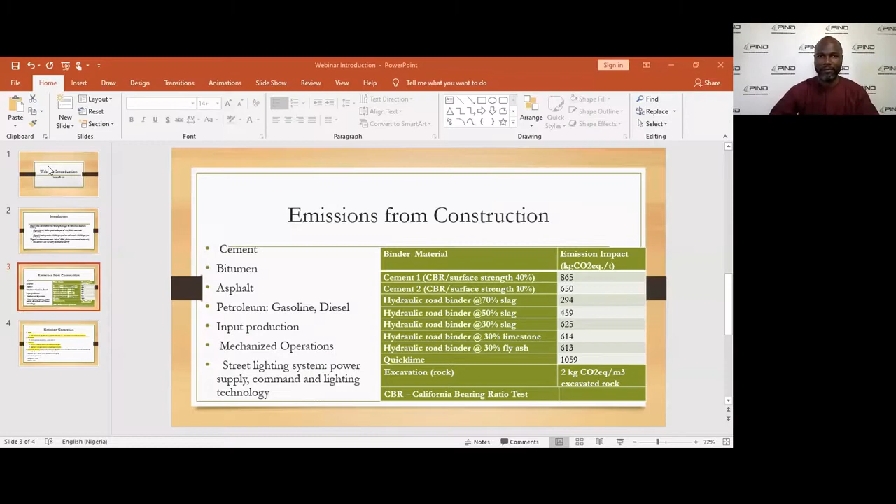I'm really excited that this conversation is coming on because we have loaded panelists from both academia and the hands-on field experience. So for us to start off, I just want us to look at what encouraged us to look into this area, however dry it has been. So just a few slides as an introduction to the webinar, and then we can get on.

Now we looked at public sector infrastructure related issues, and we know it has been a flogged sector in the sense that funding has been a challenge to it. But it becomes an additional challenge as well because apart from funding, in some ways the ones that have been done are creating enormous environmental challenges, looking at roads and buildings. We looked at, for instance, Nigeria's 195,000 kilometer road network, 60,000 of that are paved roads, and these are the ones that actually create the environmental challenges.

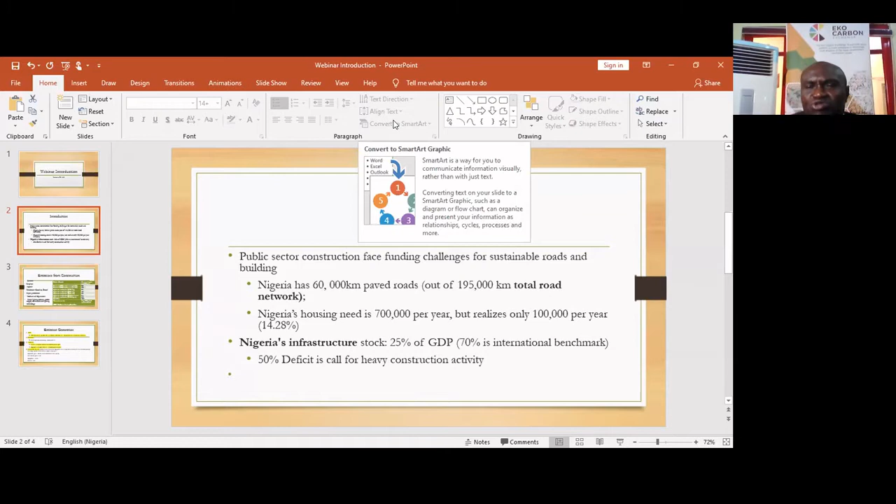We also have a need of 700,000 housing units per year in Nigeria. We realize we're at just about 100,000, which means just 14.28%. If we're going to go optimum, we're going to be creating massive environmental emission issues, which means if we're actually going to be going towards 20, 25, 30% and all that, we need to be ready to make it environmentally friendly. We also find that Nigeria's infrastructure stock is just about 25% of GDP, and international benchmark says countries should strive to get 70% of GDP as infrastructure stock. So we have a 50% deficit already, which means every government that comes on is going to be striving towards closing that gap.

Now we dive further into the emission issues in construction. I know that we have experts who are going to be talking to these issues as we continue. We look at the materials: cement, bitumen, asphalt, petroleum products, and then the operations itself, the mechanized operations, and power, and all of those that are part of what constitutes the built environment, whether it's roads, whether it's buildings, and all of that.

And when we check the emission impact of some of this, we find that for inputs like cement, first grade cement surface strength is about 40%, which means a lot of cement has been used, and that generates about 865 kilogram carbon dioxide per ton of that input. For cement 2, it's about 10%. Now if you use cement 2, even though it generates 650 kilogram carbon dioxide equivalent per ton, of course in our own environment which is tropical, you can be sure the road or building pavement will be breaking down quite often.

We also look at materials such as hydraulic road binders, and we found their levels of emission input, and that tells us a lot is being generated from that sector. It made us say, okay, can we start talking about this issue? Look at quicklime, for instance: it's 1.059 tons of carbon dioxide equivalent per ton of this material. So you see, generating heavily into the environment, and nobody is actually talking about this. You look at others like slag, like limestone, these are heavy emitters into the environment.

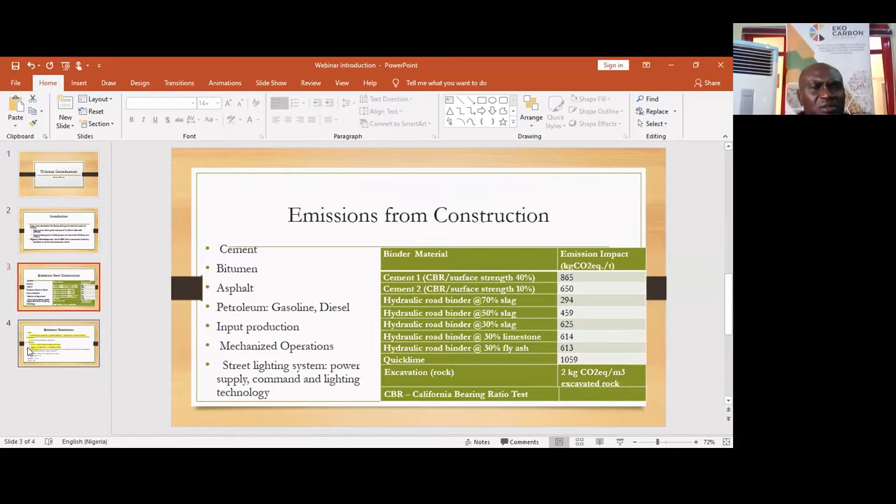Finally, we looked at total emission. In some cities, road construction generates 6 kilogram carbon dioxide per meter square per year of emission, and these are secondary roads. It could reach upwards of 1,100 kilogram carbon dioxide equivalent per meter square per year for primary roads. Now these are major, these are heavy. And you see, in cities especially, you'll find a lot of massive, heavy construction being done. For instance, in Lagos, the road being constructed basically with cement by Dangote should be classified at this level of emission. Also, earthworks generate their own emissions.

Pavements, when done with bitumen and asphalt, any bitumen in asphaltic concrete, this quantity is 0.672 ton carbon dioxide equivalent per meter cube of space. This is heavy, if you ask me. And then if it is also a pavement with aggregates in asphalt, it's 16 kilogram carbon dioxide equivalent per meter cube of space.

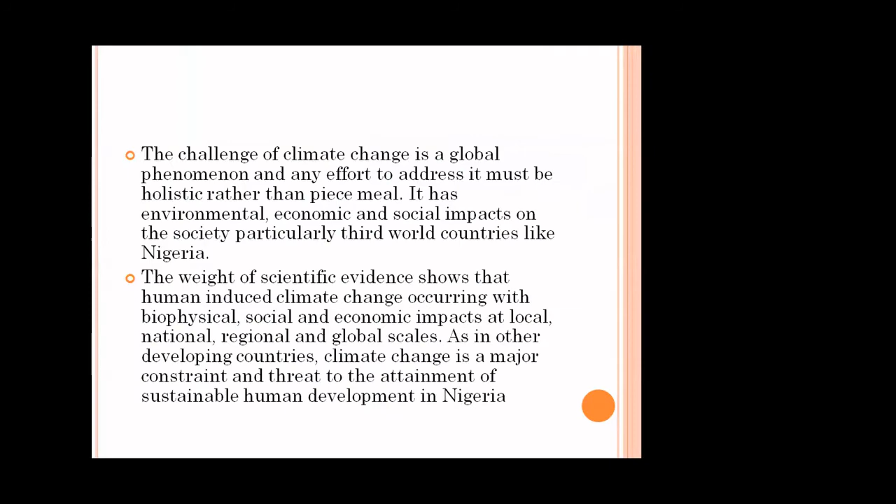In doing my presentation, I need to do a little background introduction about the sources of emissions in the construction industry. Basically, what makes us interested in this topic is the harm it does to the environment, both health-wise and to the productivity of the people who live in the city, in the country.

There have been a lot of research and publications on emissions. In 2009, DFID predicted that climate change could result in loss of GDP of between 6% and 30% by 2050, and that could be translated to a loss of almost 100 to 150 billion naira in Nigeria if we don't adapt a more sustainable policy to control emission.

The construction industry, building emission, is about 50% of the carbon emission that causes climate change. And in the construction industry, emission comes in different forms, both in the production of the raw materials for construction, like cement, paint, blocks, and all these things. All these things use fossil energy, which emits carbon.

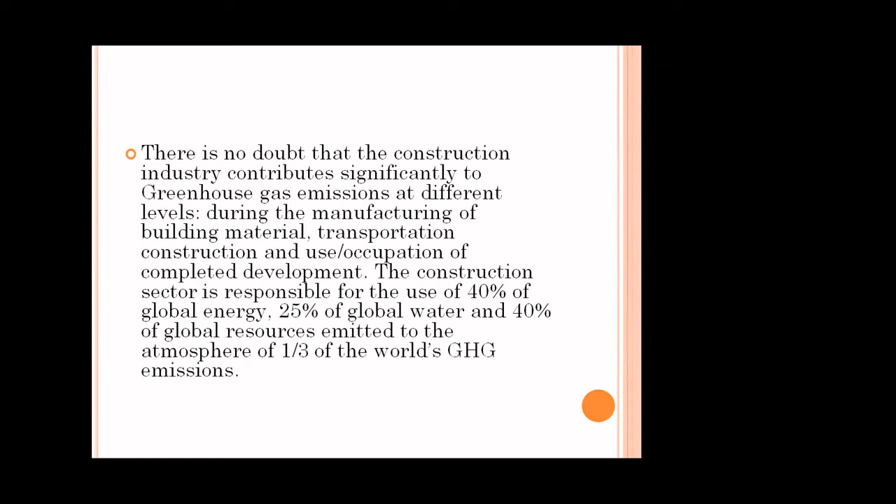During the construction phase, about 60% of the world's electricity is consumed. Inefficiency in the use of energy will gradually degrade the quality of the environment globally. Carbon dioxide emission is triggered by energy released during the building life cycle, starting from the production stage, construction phase, operational phase, and demolition phase.

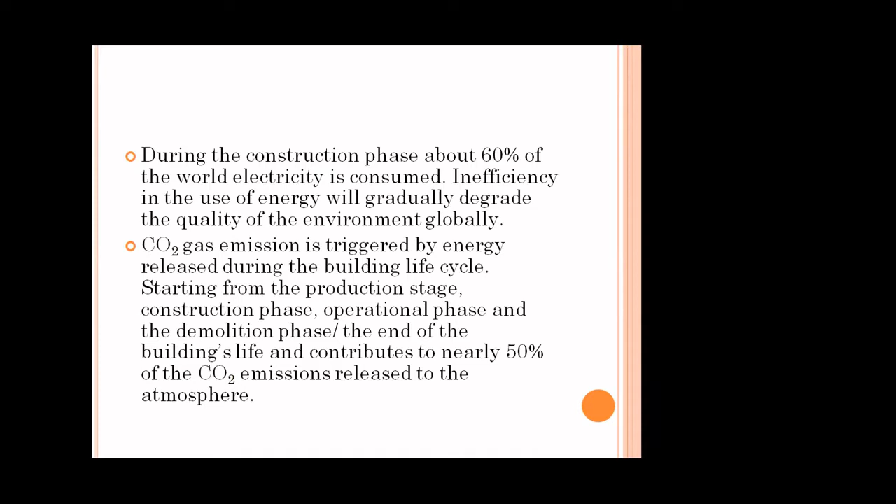The end of the building life contributes to nearly 50% of the carbon dioxide emission released to the atmosphere. There's no doubt that construction emissions have adverse effects on the health of individuals that live in the vicinity or the country. When health is affected adversely, aggregate output in the country will be reduced. This is in tandem with the saying that health is wealth. Without good health, it will be almost impossible to undertake any meaningful economic activity.

The level of emission into the atmosphere in Nigeria as a result of construction activity is a major concern in society. I mentioned road construction, the carbon that comes from road asphalt, using concrete in construction of buildings, and iron and steel. During the production of iron and steel and at the construction level, it emits carbon.

The life cycle of a building provides an organized pattern of connection between the built environment and global climate. First, at the predevelopment level, where we clear the forest, we destroy the carbon sink which the forest provides. This stage involves conversion of virgin land into a variety of activities connected to the destruction of carbon sinks in the forest.

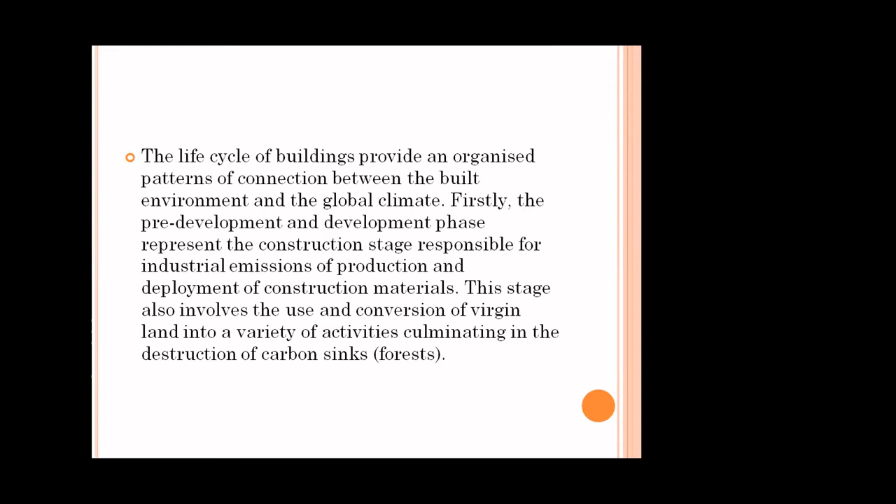Next is the operation stage, the most active life of the building. Energy is at its peak at this stage, as household activities rely heavily on fossil fuels. For electricity, most people still use filament bulbs, which release 90% of their energy as heat. Only 10% of the energy in bulbs produces light. The remaining 90% produces heat energy, which heats up the environment, and carbon also goes with it.

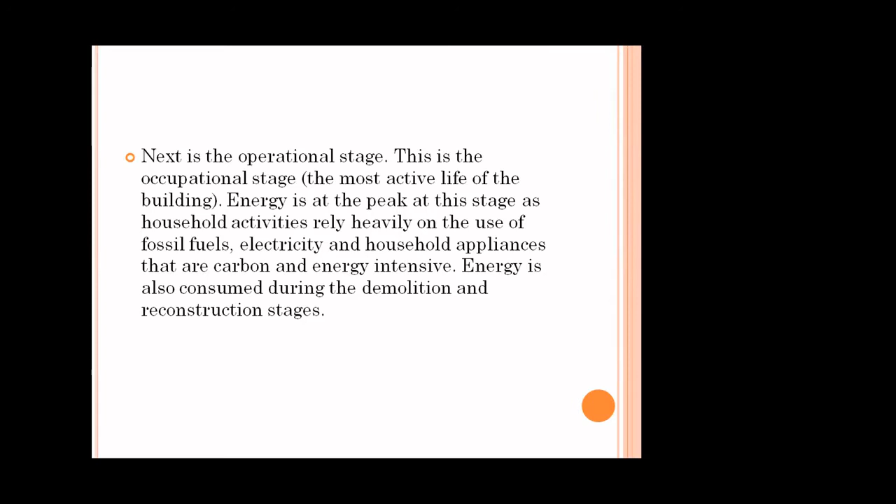The same applies to facilities we use, like gas cookers, cooling facilities, and heaters in countries that are in cold regions. So all this use of electricity and household appliances is carbon and energy intensive. Energy is also consumed during the demolition and reconstruction stages of buildings. Carbon dioxide is the most important greenhouse gas and the primary substance responsible for global warming and hence climate change.

Any attempt to mitigate emissions in the construction industry must pay special attention to carbon dioxide emission, among others, as it is at the center of climate change. Climate change experts have observed that the manufacturing industry, transportation of building materials, and construction of buildings consume a huge amount of energy, with consequent emission of large amounts of carbon dioxide, which have negative effects on citizens and their health.

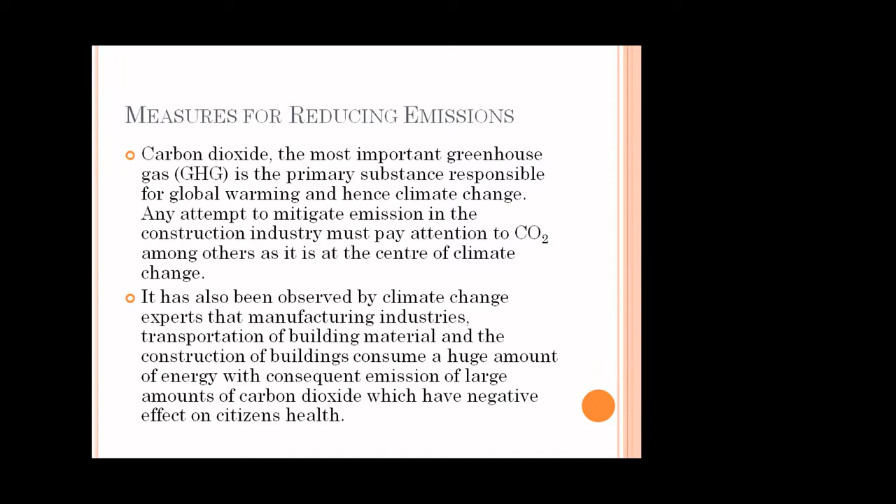In order to address the challenge of carbon emission, particularly in Nigeria, there is need for an environmental policy targeted towards elimination of carbon emission through the use of eco-friendly building materials. There's a study that came out recently showing that bamboo has more tensile strength than steel, and it could be used for reinforcement instead of iron and steel. I believe bamboo will have less environmental effect compared with the steel we use today.

Some people use EPS, expanded polystyrene, with mild steel and small concrete, which usually reduces the quantity of concrete used in construction. All these things will reduce the level of carbon emission in the construction industry. This will involve provision of emission monitoring and management, and awareness creation among citizens, so they are aware of the danger and havoc caused by carbon emission to society.

And its danger in escalating climate change. This will also include carbon rating. We don't have carbon rating. If you have carbon rating, it gives businessmen and industrialists the incentive to reduce their carbon emission. If you are given carbon credit or carbon rating for reducing emission by a certain level, that will encourage users to reduce carbon emission in their enterprise or behavior. Every manufacturing industry must have an environmental department, which should be drawn from national policy.

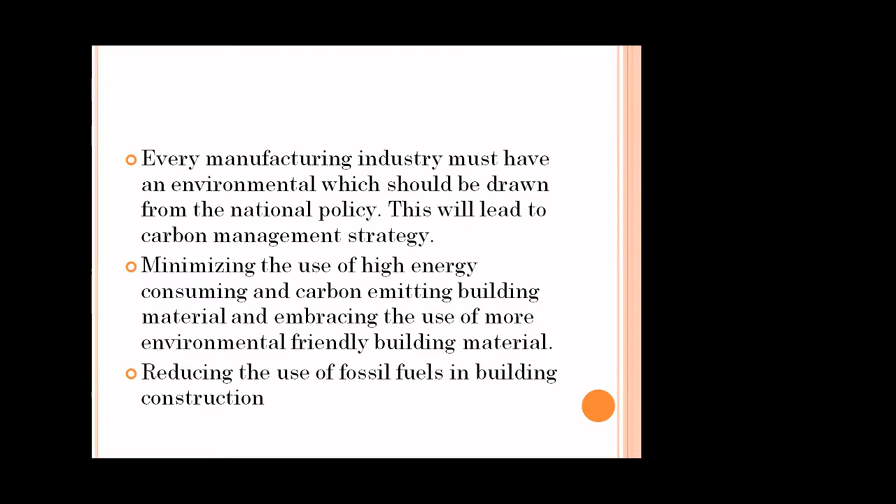Reducing the use of fossil fuels in building construction, all this will help to reduce emission. Carbon rating buildings constitute the most pronounced tools being used in recent times by real estate professionals in countries like UK, US, and Canada, which is still lacking in our country. And it helps to reduce maintenance costs of buildings.

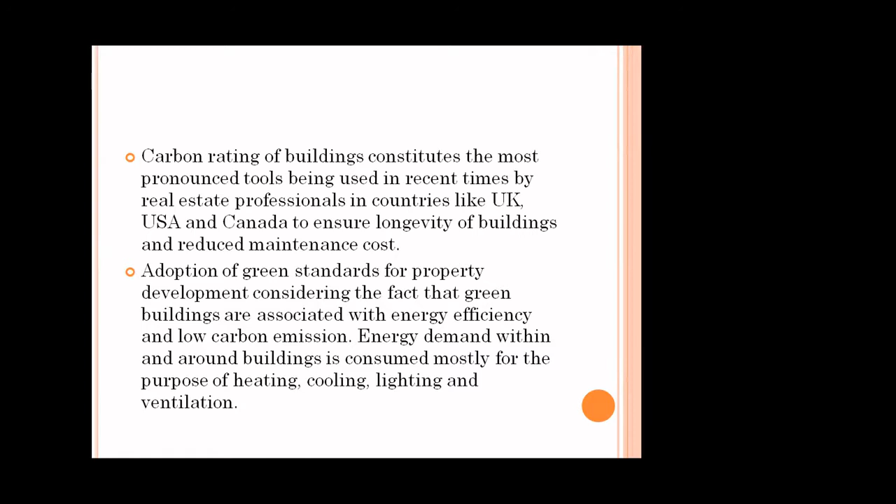Adoption of green standards for property development will help us go a long way in reducing emission in building operation, considering the fact that green buildings are associated with energy efficiency and low carbon emission. Energy demand within and around buildings is consumed mostly for heating, cooling, lighting, and ventilation.

Features of green buildings imbibe high-tech and modern energy saving practices like sensor-controlled lighting and compact fluorescent and energy-saving lighting, high efficiency heat pumps, geothermal heating, photovoltaic cell arrays, and optimal use of fresh and natural light, harnessing natural circumstances for cooling, and installation into design to reduce energy requirements in building operation and prevent greenhouse gas emissions.

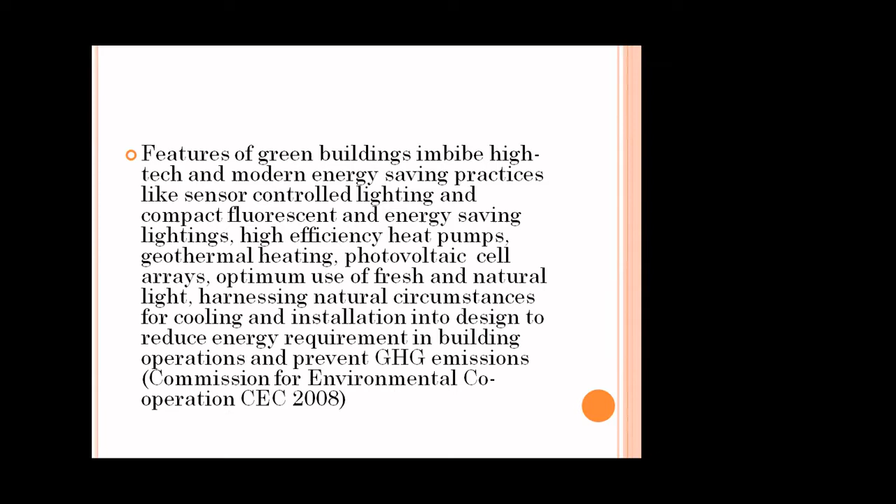This is from the Commission for Environmental Cooperation. Green buildings focus on increasing the efficiency of resource use, such as energy, water, and material use, reducing the impact on health.

So you can see that in Nigeria we are still yet to embrace this issue of green buildings. Currently there are about 6 or 7 certified green buildings in Nigeria, and they are all located in Lagos, in VI and Ikoyi, and only 7 of them are certified, and they are all commercial buildings. Currently there is no certified green residential building in Nigeria.

And from the construction industry, in the building sector, residential buildings emit the highest level of greenhouse gas emission, have the higher level of greenhouse gas emission, which is a major problem. So we have to look at having a green standard policy.

In the US they have the LEEDs, this is Leadership in Energy and Environmental Design. In the UK they have the BREEAM. In Canada and other different countries, they have their own standards. In Africa, it's only South Africa that has already embraced green standards and sustainable environmental policy.

So we need to actually have a policy that will help us control greenhouse emissions in Nigeria by having a green standard in buildings, an environmental policy that will guide industrial operators on how they emit carbon and other emissions that are not friendly to the environment. We cannot allow everybody to do whatever he likes. That becomes a society that is not organized and prepared, leading to anarchy.

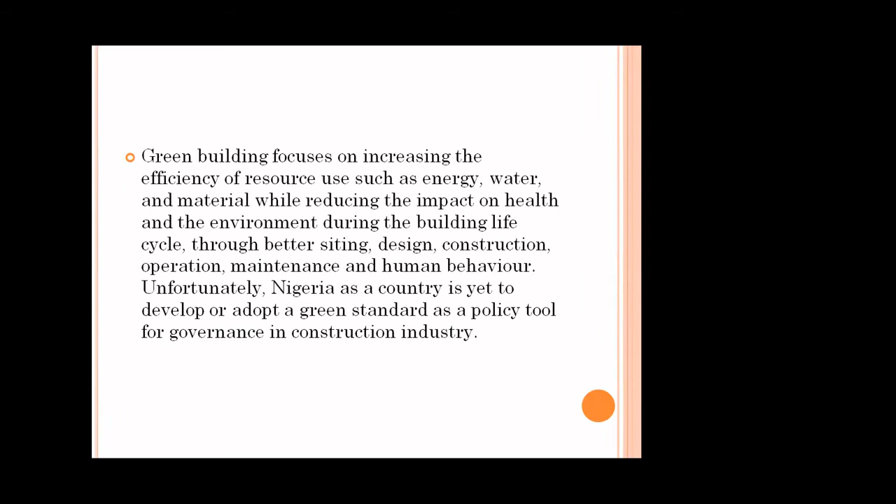So Nigeria as a country is yet to develop or adopt green standards as a policy tool for governance in the construction industry. So as a summary, we have to look at the materials we use. They have to be eco-friendly, so that we have less negative impact on the health of society.

We have to introduce carbon rating. We have to introduce green standards. We have to embrace more environmentally friendly materials in construction, in the construction industry, and there must be regulation guiding industries on carbon emission. And there must be a minimum level or a maximum level of emission that should be tolerated by industries in the construction sector.

Without this, it will be anarchy in the construction industry. So we need to have a policy that will guide us. But if there's no standard, then the result is chaos. So we have to standardize our construction industry in terms of environmental policy and energy standards, including carbon emission.

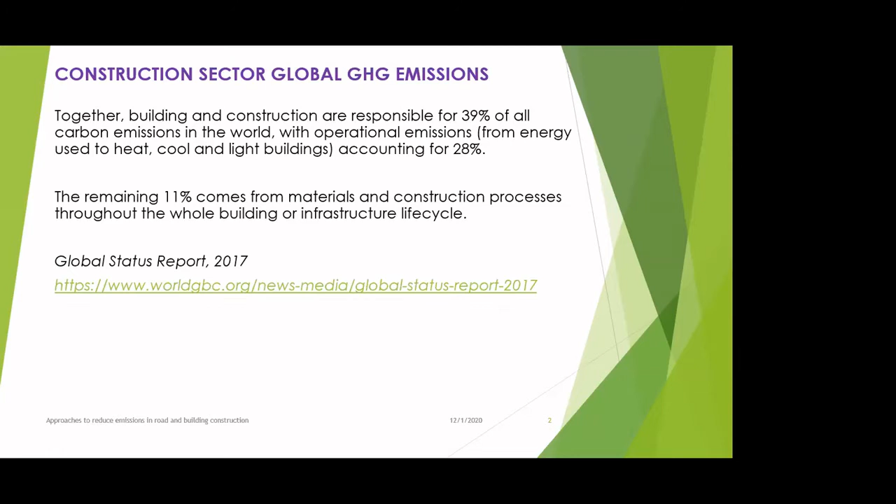Generally, the biggest GHG emission source in the construction sector is energy. And just as Prof has said, a lot of construction processes still use a lot of non-renewable energy, whether it is natural gas, oil, coal, or sometimes even as bad as petrol or diesel, which even leave impacts on the road sometimes. But that's where we are at this stage.

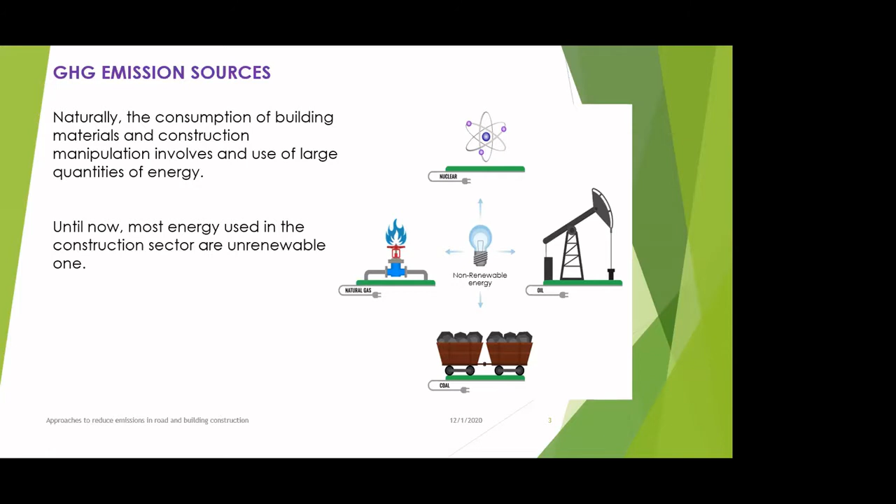It's also very good for us to note the GHG generators. So what are the generators in this entire construction process? We have the materials, which some will call the supply chain, but nonetheless, they're still the materials. Mr. Innocent had given us the carbon emission equivalent for each of those products earlier, cement, bricks, and all of the likes.

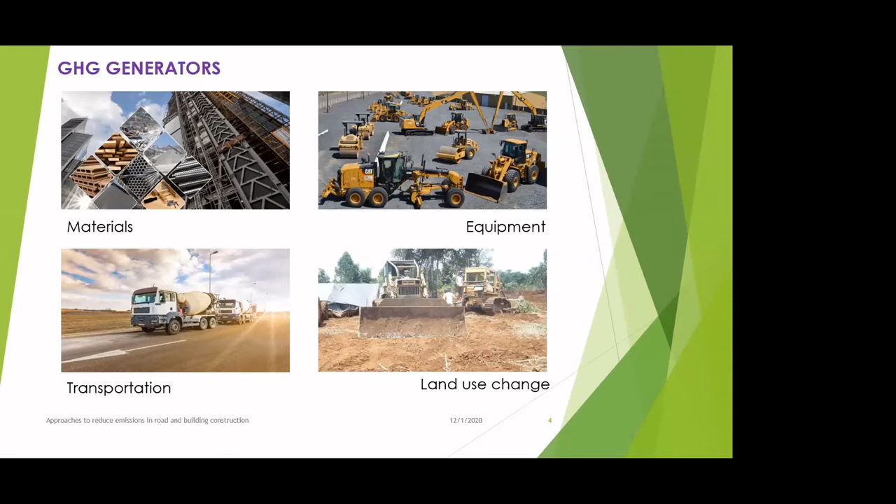Then we have the equipment, which is also a big factor - equipment usage, transportation of these materials to and from site. And then land use change, very, very key. Just like you said earlier about forests being destroyed in Cross River, it's happening everywhere. When these things are done, there's no provision to actually reabsorb this carbon, maybe by planting trees across or making gardens and other smaller efforts.

But my focus will be on the approaches. I won't go into details of what Prof has talked about, and the approaches are very practical, and some are actually being used. The first one is in the materials. As we know, these materials are heavy in terms of carbon and GHG emissions, whether it's concrete, steel, or even wood, which can sometimes be heavy because wood most likely leads to deforestation if you don't plant back.

But nonetheless, we've had situations where a lot of construction has been done by reusing and recycling some of these materials, concrete and steel. I'm sure Prof can give more insights on when we calculate BOQs in construction sites - bill of quantities - where some contractors come with ridiculous quantities to be used, and an environmental engineer or someone who knows about sustainability comes in and starts cutting everything down, saying you don't need all of this if you reuse and recycle some of these materials.

Also, we've seen the use of warm or half-warm asphalt. We know that in Nigeria we like to use asphalt hot. Hot means more emissions, hot means more energy, but if it's used warm at a lower cooling temperature, it performs the same function. Also, use of fly ash in concrete.

This is mainly used in countries where they have a lot of coal residues. I know Dangote is trying to do that, especially because the Obajana plant is being run on coal. So it's something you can introduce fly ash into concrete being used for road construction, and even sometimes for buildings, because fly ash has also been known to be a very good sticking agent.

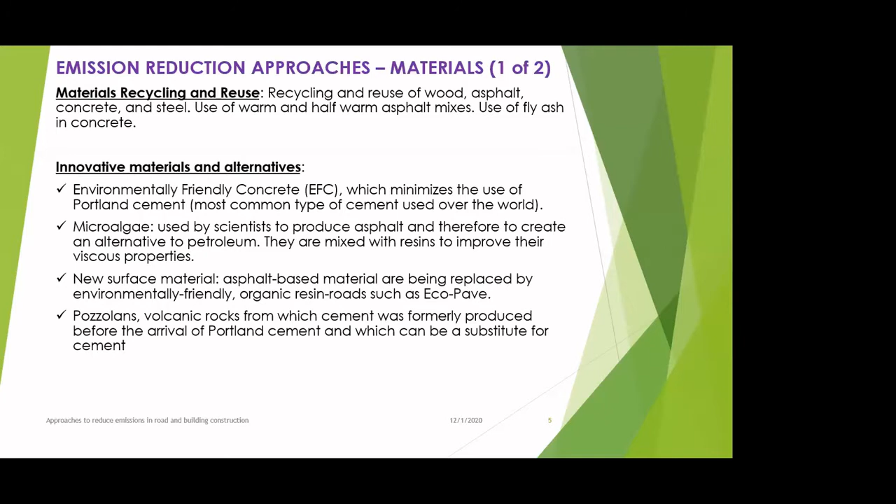Still on materials, we should also note - Prof earlier mentioned replacement of wood and steel. I wouldn't want people to get confused, thinking are we going to be using bamboo for Third Mainland Bridge? No, it's not that kind of replacement.

We had to put an entire concrete barrier just to show that the road is closed. Somebody colliding with that concrete is a safety hazard on its own. The safety barrier, I mean, you can't have bamboos or even reinforced plastics. It has to be concrete. Everything just has to be so hard and difficult, and all of this leads to more emissions.

So, location of safety barriers, redesigning some roads whereby you have wood barriers. We won't have wood barriers on Third Mainland Bridge because of the water, but I've seen areas of Third Mainland Bridge - I couldn't get the picture - where maybe you're about to climb the bridge around the Adekunle or Yaba axis. These areas are very close to residentials, very close to houses beside, and then you still have concrete reinforcing it. To me, that's a waste of concrete. But this was done way back.

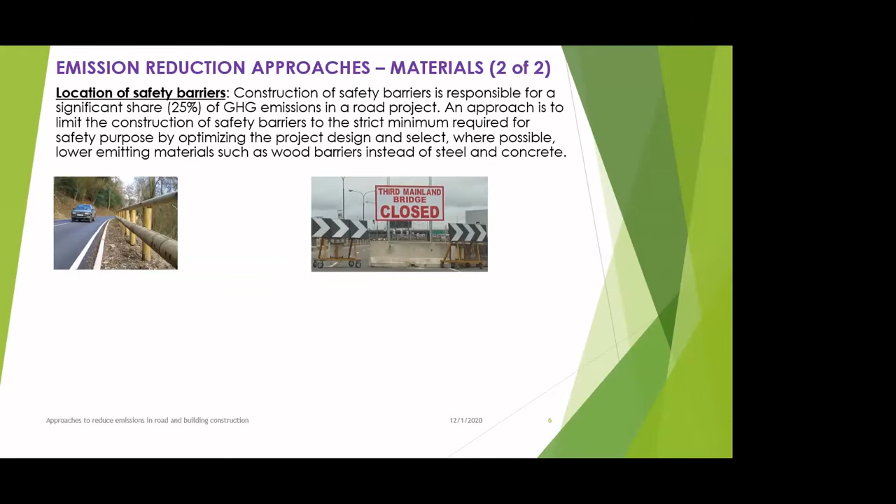So it's just a lesson that going forward, road design should actually look at areas where they can reduce some of the usage of these high emitting materials.

Now let's go to equipment. Equipment is very key in construction, whether it is road or building. Luckily for us, Nigeria is not yet in that picture, but we tend to use heavy equipment instead of labor-intensive techniques. Naturally, research has shown that using a form of light equipment with labor actually reduces your emissions, which is true - people will emit less than the equipment.

So again, research has shown that if it's for the same purpose, which is to make it straight, human error is not that significant. So why don't you use more labor-intensive techniques to reduce your emissions?

And generally, equipment selection, fuel selection - now we have equipment running on natural gas, which is less polluting - reducing idling.

I don't know if most of the people on this call are aware of what is going on in Lagos with the Oshodi-Apapa Expressway being done. This is a route I pass almost every day, and sometimes on the route I just take pictures of equipment idling. They've not finished laying the cement, and the guy that wants to straighten the cement is already running the device - maybe it's to keep it warm, I don't know. But we have that high level of idling, and sometimes this can be neglected. Contractors just feel it's nothing, it's not a big deal - how many minutes is this going to run? Not knowing that 10 or 20 minutes has actually contributed a lot to global warming on the larger scale.

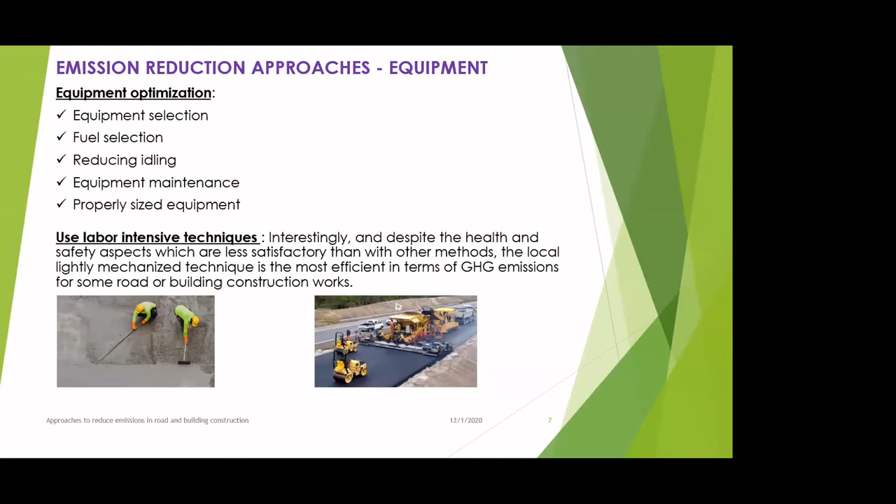Equipment maintenance is key. We've seen situations where equipment actually break down on site, and then properly sized equipment - this will also take us into transportation.

This is another key part where emissions skyrocket in construction projects, especially even in building construction. Again, we now have natural gas powered trucks, so we don't have to rely on petrol and diesel. The size of trucks matters a lot. I've seen sites where we just see tiny trucks supplying sand and granite, and the more trucks you have, the more emissions. Get larger trucks that are going to emit less and make your transportation more efficient.

But we see a couple of smaller trucks just coming in and out, and it's more emissions. It's also more gridlock in terms of traffic. Improving driving habits, less idle time, more night transport means that you get to see less traffic during the busy period, and you reduce your emissions.

I also feel some of these things are very, very important in reducing cost in construction. Sometimes we come up with these reduction approaches and contractors think it's going to increase cost, but by the time you do the cost benefit analysis, you find that it's actually cheaper - you use less diesel, less petrol for your truck supplying the sand. All it takes is better planning and design. You don't have to make everything rushed.

They're always doing things in a rush, so they want all the trucks to come on the same day. But when you have a plan of 3 or 5 months, where you know where your raw materials are going to come, then all of this can be put into perspective.

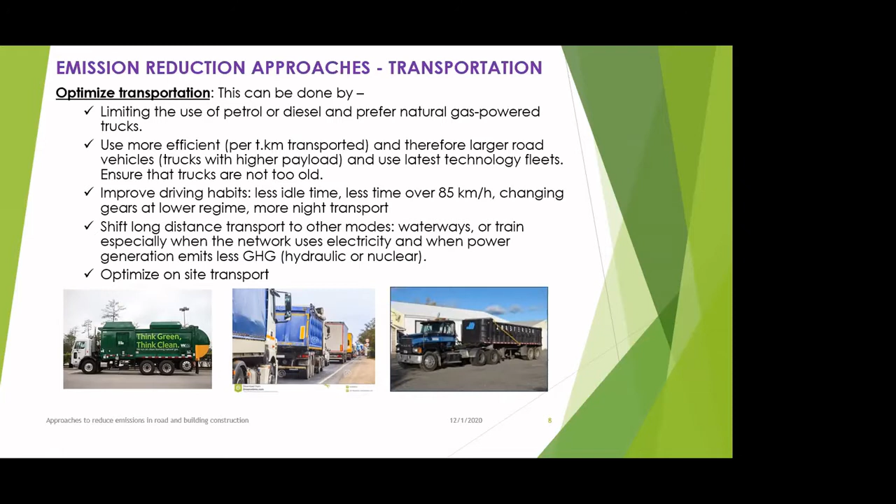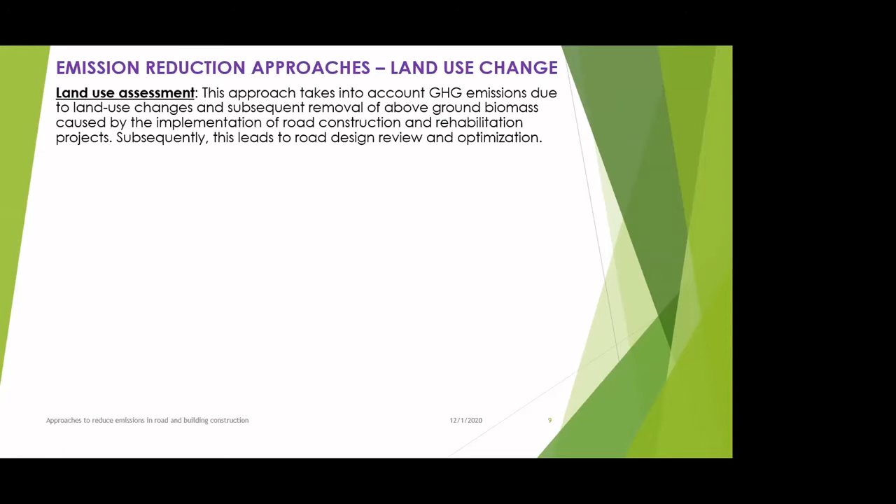And then land use assessment. Just like we've said, land use change is critical in any construction, whether residential or building. This is the part where we do the environmental impact assessment to check the land use. A lot of constructions don't put this into perspective - they just feel the road is more important than the vegetation, or the road is more important than the households. Once we begin to think like that, we begin to run a capitalist economy and forget about sustainability. So land use is also very key in reduction approaches.

But very quickly, I wanted to run us through rating systems. Why did I want to do this? Prof mentioned earlier that there are about 6 or 7 buildings certified, and I wanted to reiterate this. In 2014, IFC came together with EDGE - that's Excellence in Design for Greater Efficiencies - and they did the EDGE building certification. For now, only 5 buildings in Nigeria have that certification.

The Alpha 1 building in Eko Atlantic City is a commercial building for offices. The Greenage Student Housing in University of Abuja is still under construction, same with the Bluewater Lagos Homes - this is actually being done by ACA, African Capital Alliance, with Elalan. The Cornerstone Towers are commercial, and then the Peridot Parkland Estate in Abuja, also residential. Cornerstone Towers are commercial. So these are 5 buildings that have been certified by EDGE.

Now, unfortunately, I don't think there's any green building certification locally, so for now all of us will be using the IFC EDGE. But EDGE has its own limitations - it doesn't focus entirely on construction, EDGE focuses a lot on operations, after the building has been constructed. Nonetheless, EDGE also takes into account the raw materials used in construction, so it takes into account material usage.

But EDGE, for instance, will not calculate transportation of materials or the land use - no, EDGE wouldn't do that. EDGE will focus on the operation, so after you build the building, what's going to be the emission, energy and water reduction, and also the raw materials, energy and water reduction that were used in the construction phase. But nonetheless, it's a fantastic starting point to begin rating buildings.

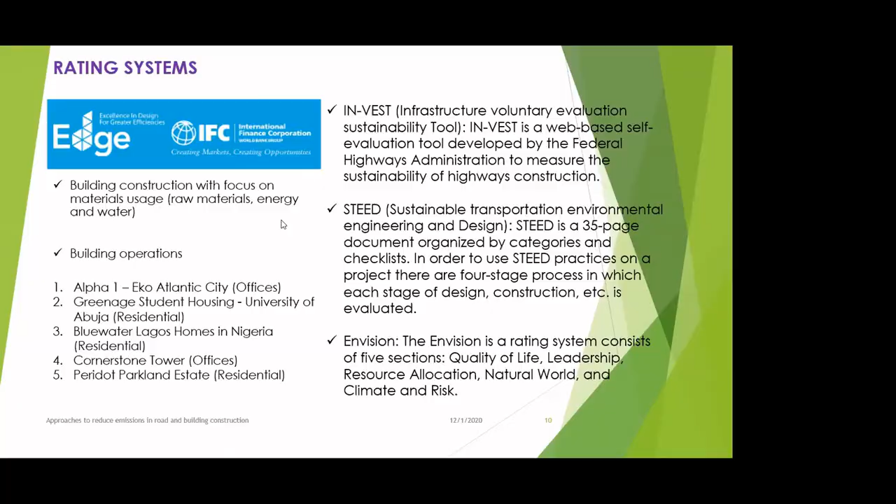So thank you very much for the attention. I hope I've been able to cover some of these approaches, and we'll be willing to take questions after. Thank you. That was very enriching.

We cannot go on to rehash what you already have given here, but it's very loud with respect to the approaches, especially with respect to materials recycling, adoption of innovative materials, and the use of alternatives, to enable our construction activities, particularly given that we adopted some practices before now which we need to change. But now we're at a crossroads between not having the appropriate policy to excite or encourage this to happen, and then having some foresighted investors going ahead to lead the way.

So it's very, very important, and you've given us also some of those innovative alternatives. The environment-friendly concrete, and then microalgae, and then you have this new solid material and the pozzolans. Very, very revealing.

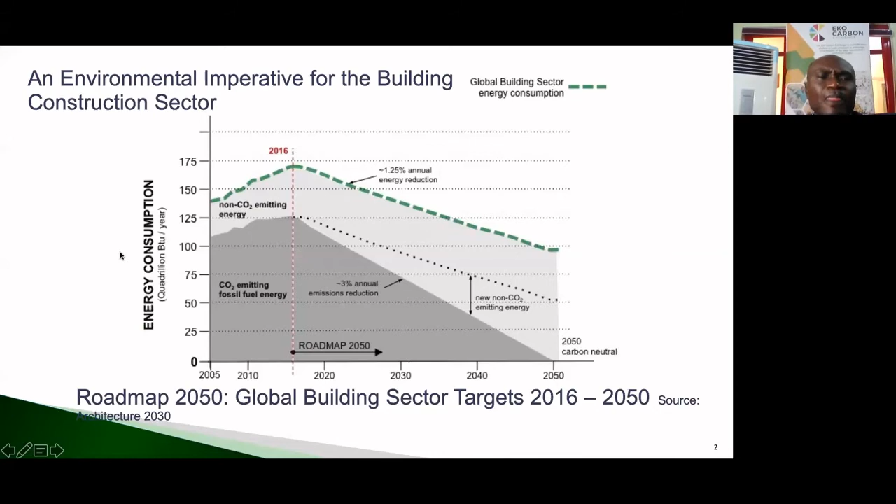Thank you very much. A lot has been said from the past two presenters, and I think I would just piggyback on everything that's been discussed. There's a lot of information they've provided on reducing carbon emissions in the built environment, a combination of the building industry and, of course, roads.

What I'll share with you today is more of our experience having done this. The Foundation for Partnership Initiatives in the Niger Delta has invested in what we count as a green building, a sustainable building, a low carbon building in the heart of the Niger Delta.

What you're seeing right now is just a quick snapshot of the destination. There's an environmental imperative for the building construction sector, where we need to get to in terms of reducing emissions. There are different commitments, and Nigeria happens to be signatory to many international conventions towards reducing carbon globally. The global construction industry, particularly the building industry, contributes immensely.

It's an opportunity for a country like Nigeria to contribute as part of their own NDCs, the nationally determined contributions towards reducing emissions.

The other sectors too, when we talk about buildings, we don't just talk about residential, industrial, and commercial. Many things happen within the building, so you really can't isolate and say it's just the building. When you think about the industrial sector, the opportunities for industries to reduce emissions lies in their buildings one way or another.

They have to retrofit buildings. The heavy engineering companies and organizations have to think about how to retrofit buildings as a way to contribute to their own environmental stewardship.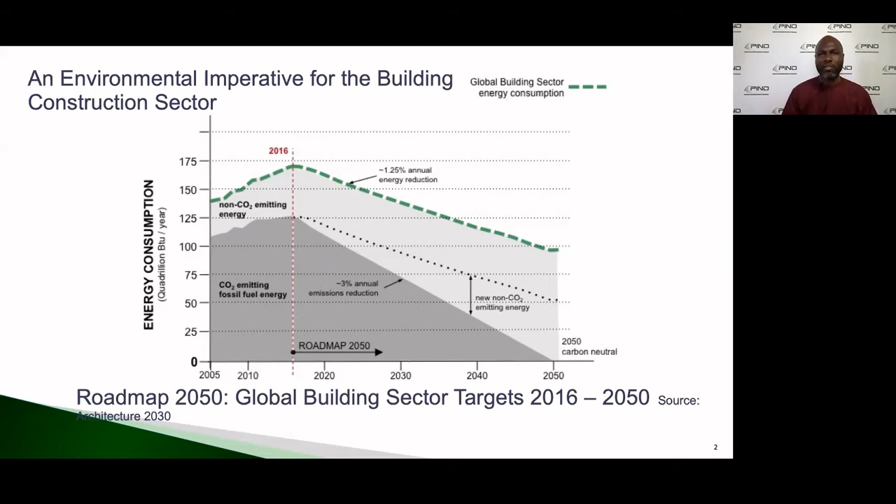So now, how do we go about it? Building construction related emissions are largely, as Dr. Tiwa said, embodied energy, which constitutes about 11%, and operative energy, which is about 28%. In combination, that's about 39% for the whole sector.

Embodied energy means the primary energy that goes into the manufacture, installation, transportation, use and disposal of materials—all the component materials that go into a building assembly. That's the bricks, the mortar, the joinery, the floors, the timber materials, the paint, the roof materials, the ceramic tiles, and the like.

So the embodied energy, for example, using a brick—if you take a unit of a brick, or a square meter of a building wall, you can actually quantify how many emissions that contributes. That's embodied energy, and that's an opportunity because we can actually reduce that. We have a lot of control in a place like Nigeria to reduce that.

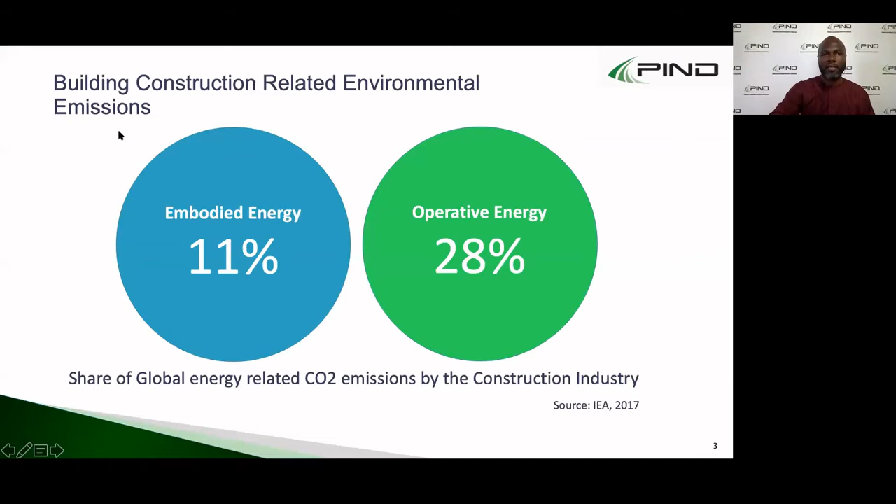Our case study in this instance is the ATED Center. ATED, for those who don't know, is the Appropriate Technology Enabled Development. It was an intervention, a project under which PIND ran over the last 5 years, and we wanted the center as a hub for those activities. So we wanted to build a low carbon building essentially.

This building was constructed in Warri, Delta State. It was built in 2015, to the Passive House standards. As Dr. Tiwa mentioned, there are different standards for construction, ratings and the like. Passive House standards emerged from Germany, from the Passive House Institute. It's very common around the German-speaking parts of the world, some parts of Europe, and America. It's a way to save energy.

The whole practice and idea of building using Passive House is using passive rather than active methods - passive solar design, using the sun as a way to take energy and use it to the benefit of the building design. Compared to conventional building methods for a new build, we were able to save 75% in terms of the energy that would have been utilized in that building.

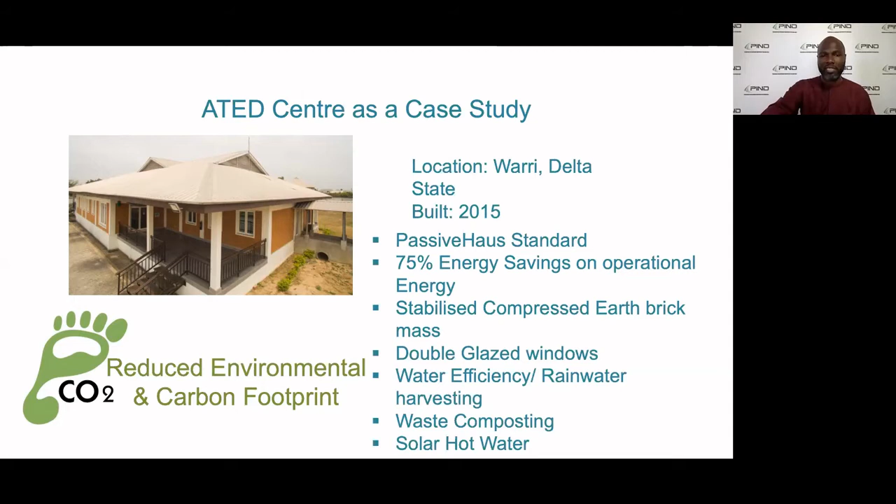So this building, compared to a business as usual scenario, has a massive reduction in its environmental, or rather carbon, footprint.

Before we set about doing this, what were the things we tried to identify? We wanted to identify that in a country like this, we can't just use a template. There's the general category of things, the usual suspects. However, in a place like Nigeria, since we don't have the standards, we have to adopt what is most reasonable. So we expect a lot of understanding of the local context - it has to be contextual to what we practice in the country.

Some of the key environmental categories we were prioritizing are climate change, fossil fuel depletion, ecological emissions, which leads some way to degradation of the environment. Water is a very major resource.

We think about water scarcity, the water stress index for most localities in the country. Resource depletion - that's your trees, and clearing of site itself has a major bearing on that. That's when the footprint of a building starts to count, when you start felling trees to site your building. Waste disposal is a major part too, either construction waste disposal or waste disposal during the life of the building.

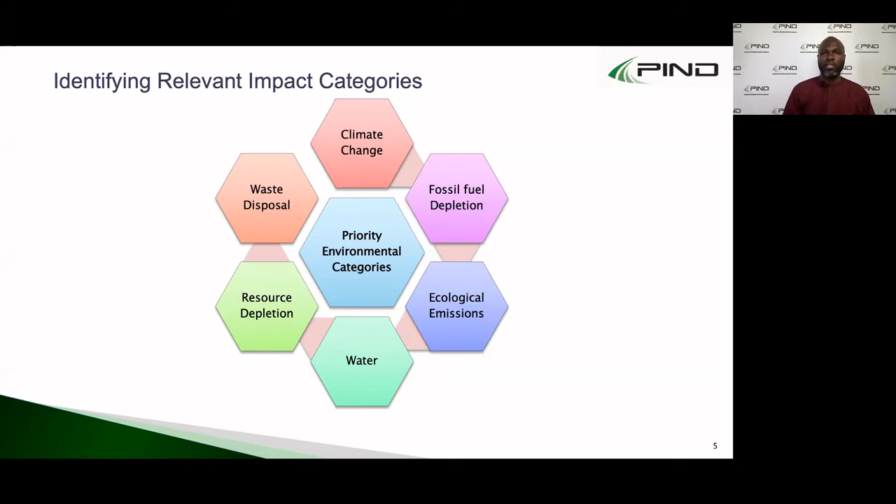Our approach was largely what you call a cradle to grave pathway - that's a whole life cycle. We look at the whole building, the whole life cycle of the building, right from the time the brick comes out from the factory, to the time it's shipped to the front of the site - what we call cradle to gate - to the site, and of course to the end of its life.

So you can literally track every unit of material used in that construction in such a way that you can think about its replacement. Some materials will probably have a 25-year lifespan; some materials need replacement 10, 15 years down the line. So we do a very thorough kind of analysis at that initial stage to look at what the impact per material and specification would be.

This is another opportunity. While we were developing this framework, if you look at the left part of that screen, you can see it's for new buildings. But of course, the moment your new building spends a couple of years, it becomes an existing building. Dr. Tiwa was making reference to the Edge, the IFC Edge tool, largely catering for some constructed buildings. So if you have those kind of constructed buildings, what are the things you need to keep your eyes on, so you don't lose the benefits that happen at the initial stage while trying to achieve gains with embodied carbon?

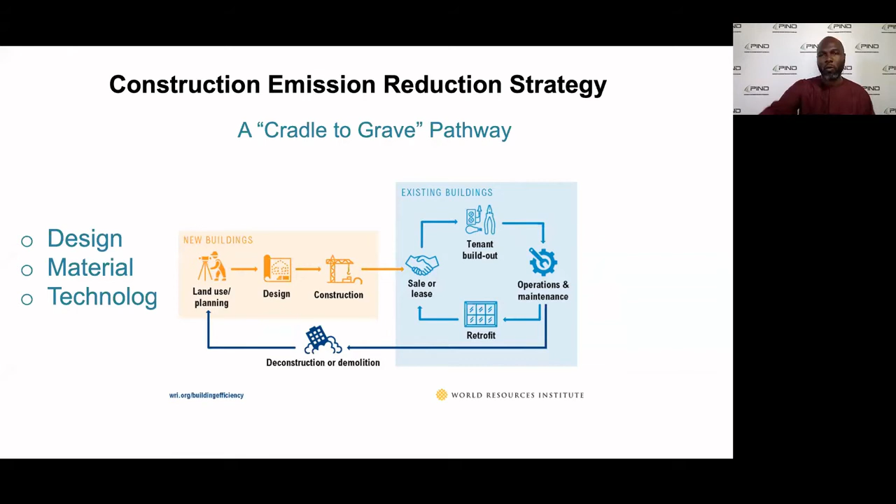So what you have on this slide is just a quick overview of our design strategies. We had a passive design, so our roof, our whole shell, and the whole structure is designed to take advantage of environmental factors, the wind, the sun path, and things like that.

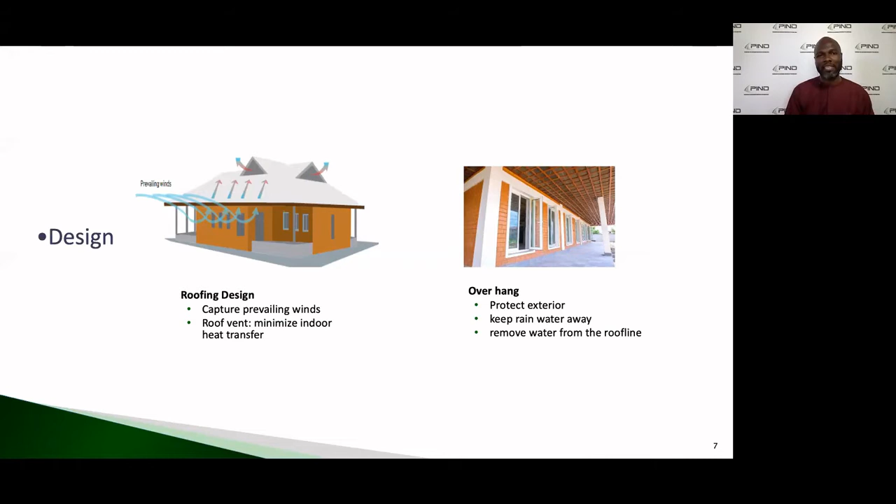Our roof has a roof vent, we call it a breathing roof. It's able to absorb heat, you can see some of that in the pictures on the left, where the heat gain from the top of the roof is managed by a sort of cooling system so that heat doesn't get down into the building. This is design that, once in place, stays for the life of the building, so it's a key decision that needs to be gotten right.

Next is materials. Like I said earlier, one of the key materials we utilized was compressed earth bricks. Compressed earth bricks have less CO2 emission because they have very little cement material in them. We all know cement is heavy in terms of its emission, it has a heavy footprint. So the less cement you use, the more you're contributing toward reduction of that footprint.

Compressed earth bricks are largely a combination of laterite and Portland cement as a stabilizer, but at a very reduced amount of Portland cement use. It's able to perform the same, and in fact gives better properties and qualities than what the industry provides, what you'd find on the normal market, which is normal sandcrete blocks.

And of course, it's also locally sourced. We have a huge deposit of laterite around parts of the Niger Delta. If you're approaching northern areas, around the Benin axis, there's a lot of red earth. We have red earth in parts of Ondo State. All these materials are there under supervised mining, and can be harnessed locally, cutting largely the transportation emissions that add to the embodied energy of most materials.

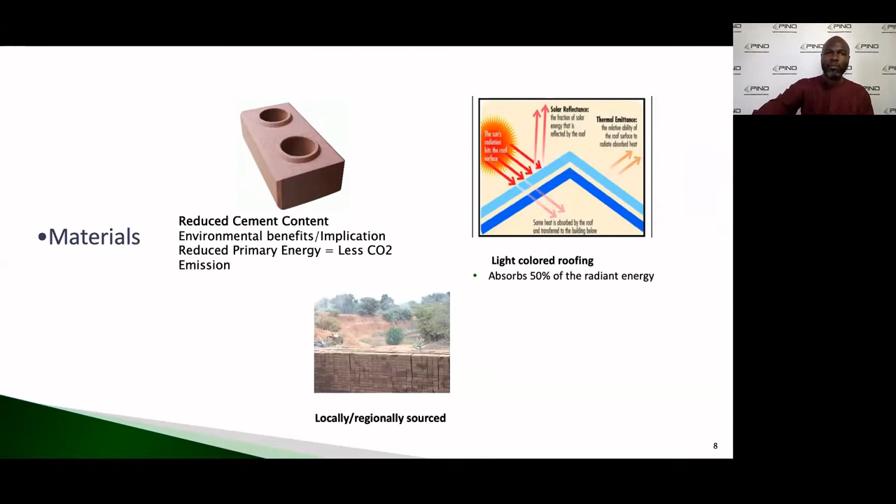Next is technology. Technology is another opportunity. When you combine all this, design, material, technology, you're looking at optimizing the sort of performance you will get from your building.

In our own case, technology, we went above and beyond. We utilized double glazed windows, which help reduce the heat transmission between the internal and external part of the building, while traditional windows that we find in the builders market are normally single glazed and have very low thermal properties. That means while you want to look outside, we start considering reducing the window area.

But most people want to have a glass surface, to see outside, especially in an office where you need a lot of task lighting and natural daylight coming into the building. However, you need to consider the heat loss that comes from your air conditioning standard, you'd be powering the air conditioning constantly just to maintain that temperature. So the double glazed window is an important technology that came in there.

Also, we have an air handling unit, which is a major technology that supports our passive houses. It maintains the indoor climate, and it works as a smart system.

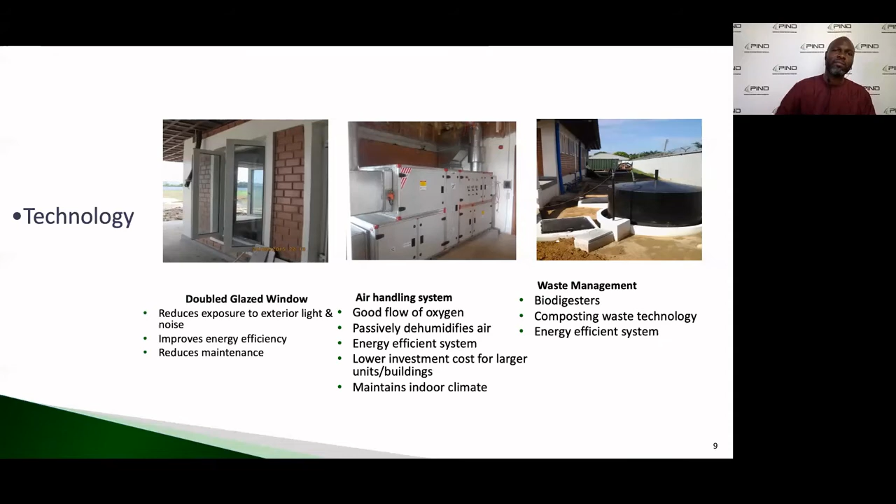So that's what we did at PIND. Some of the guidelines, we've heard about different standards, not having a standard in this country. But even though we don't have a standard here, many organizations, especially international organizations, have a requirement for environmental stewardship and have signed up to different charters to demonstrate sustainability and environmental responsiveness. So they tend to use other standards that we can classify as global.

The ISO provides us this platform, with guidelines that cut across any industry. For construction, you find the Roadmap to Zero Emissions, a major body of research from Architecture 2030. Then we have British Standards, Sustainability of Construction Works, and Environmental Product Declarations, which is a supporting document for the specification industry. Specification is the backbone of construction. Then there's also the Green Guide to Specification. There's a host of others, you just need to choose.

There's a need to have an understanding of the sector, of what you can combine, and with that we can begin to have different organizations practicing and adopting these different building methods. Then we have the critical mass to actually influence major change within the Nigerian building sector.